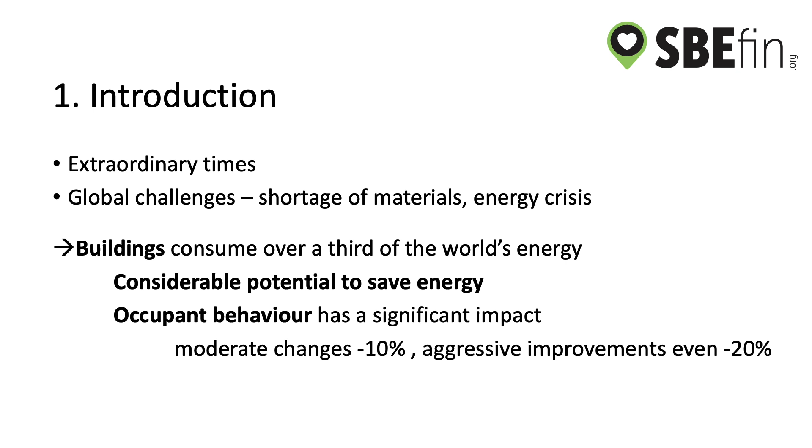We are living extraordinary times now. In 2019, the COVID pandemic struck the world, and after 3 years, when surviving from that, Russia invaded Ukraine. So these global challenges are causing shortage of materials and energy crisis. It's a well-known fact that buildings are consuming over a third of the world's energy. So there is considerable potential for saving. This paper shows one example from Finland. It's also occupant behavior that has significant impact. There is up to 10% saving potential with moderate changes, and with aggressive improvements even 20%.

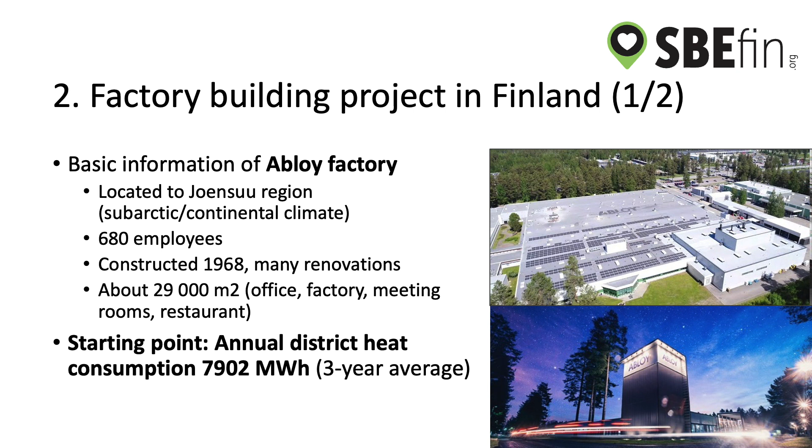The factory building from Abloy is located in Joensuu region, that is in subarctic or continental climate. There are 680 employees in the building, working mainly in 2 production lines. One is for the lock factory and another for the closer factory. Building is constructed in 1968 and has gone through many renovations. The size is huge, almost 30,000 square meters, with spaces including office, factory, meeting rooms and restaurant. There is great saving potential with energy. The starting point in annual district heating consumption is almost 8,000 megawatt hours in 3-year average.

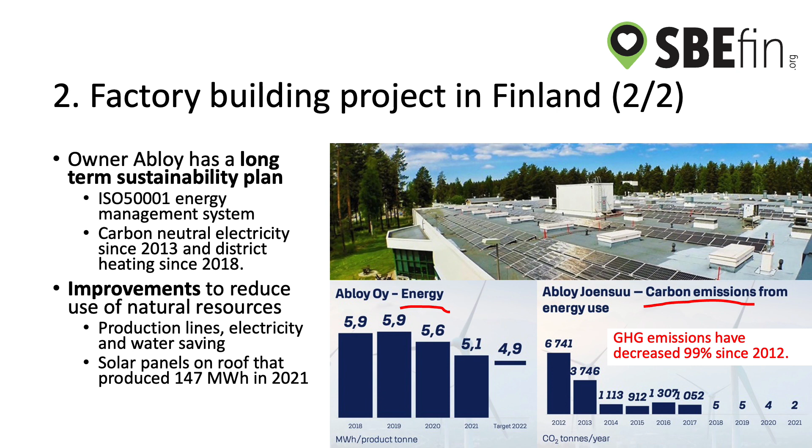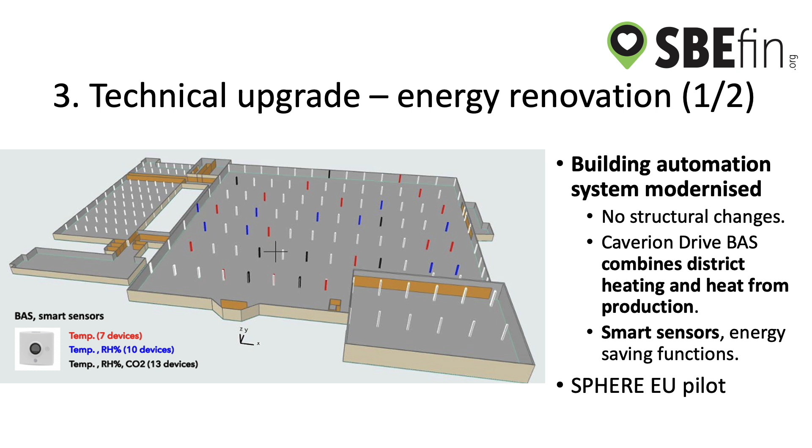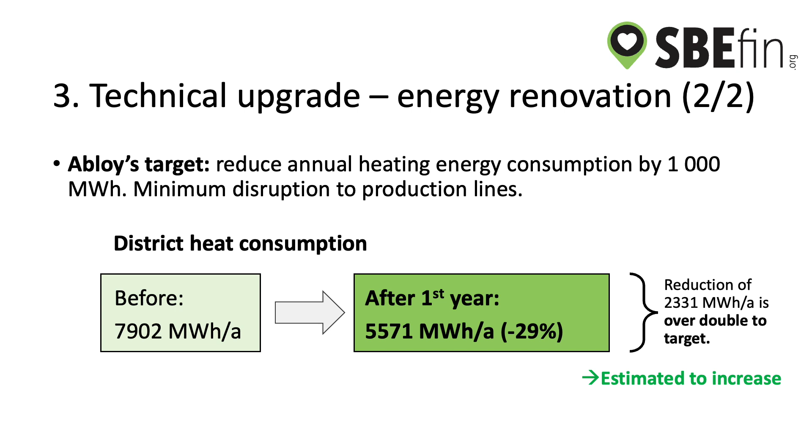The target for the project was the reduction of energy consumption for heating by 1000 megawatt hours, and since the factory building is in use with minimum disruption to the production lines, the project succeeded well. The results indicate that after first year, the energy consumption for heating was 5571 megawatt hours. 29% less than earlier, meaning a reduction that was over double the target. And this is also estimated to increase. 2 production lines were not operated full year. The reduction will be almost 40%.

Another result in the project was thermal conditions and well-being. The aim is to create tolerable working conditions for employees. Heating has to be balanced during the winter and summer periods. In Finland, the weather conditions have extremes during the year. In the winter time there may be even minus 20 degrees, and during the summertime over plus 30 degrees.

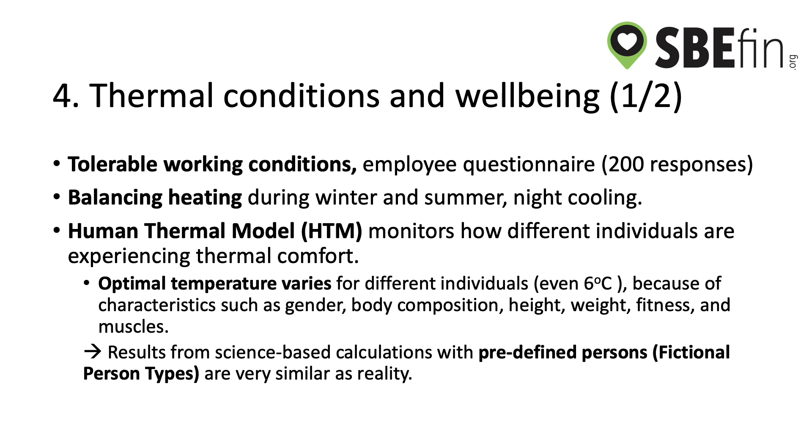One of the tools utilized in the SBEfin project is human thermal model, used for monitoring how different individuals are experiencing thermal comfort. The optimal temperature between different people may be even 6 degrees different, depending, for example, on gender, body compositions, varied heights, different weights, different level of fitness, and amount of muscles. In the calculations, predefined science-based person values are used instead of the reality. These fictional person types indicate reality very well. And also, there is no need to ask permission from the employees.

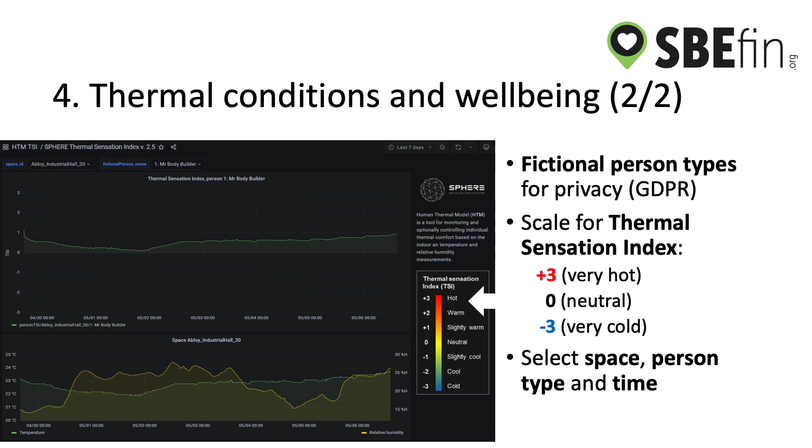The work shows how committed owner Abloy is on long-term sustainability. The positive results from technical upgrade by Caverion have already shown a reduction, -29% in heating energy consumption. The target was exceeded, and with human thermal model, the owner is also capable to monitor thermal conditions from employee perspective. To conclude, we have presented here that there is great energy saving potential in large and complex factory buildings, and therefore can provide better impacts globally.

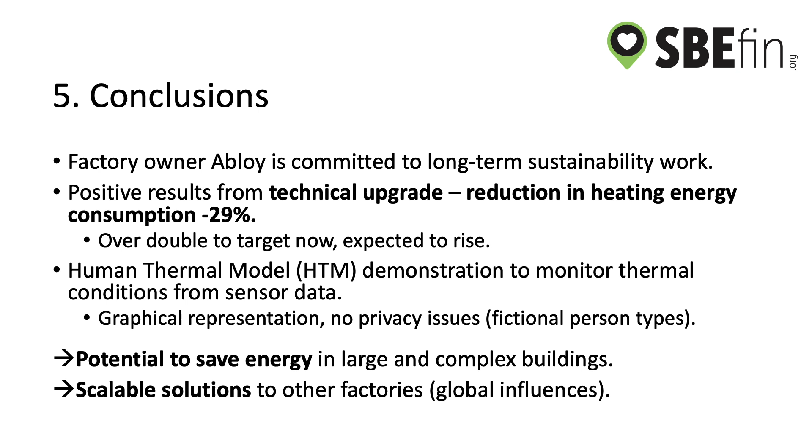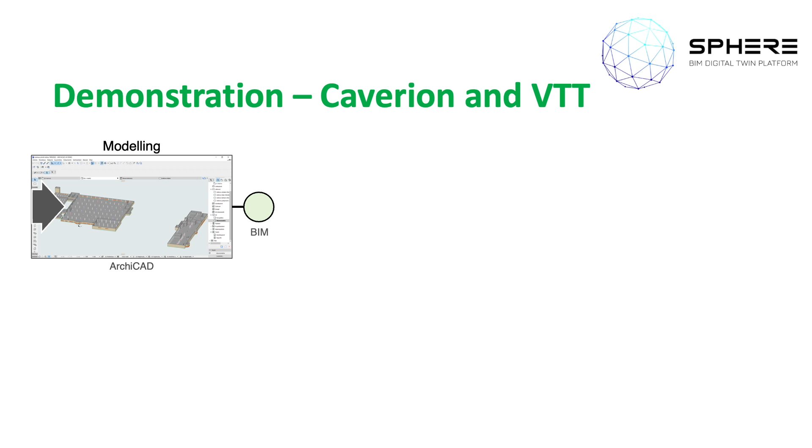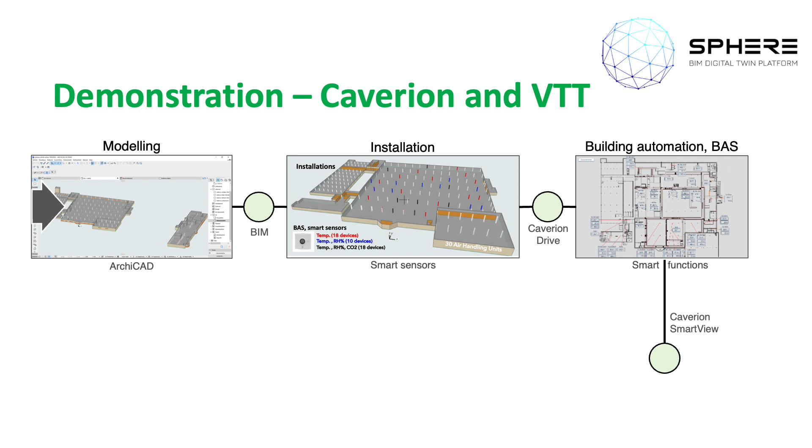In the end, we show demonstration from SBEfin project from Caverion and VTT. Building was modeled with ArchiCAD. The BIM model was used for the installation of the smart sensors that were connected to Caverion Drive building automation system to create smart functions. Through Caverion SmartView, the integration was done to VTT research platform to host pilot data in the SBEfin project. An API was built for digital twin for human thermal model. Results show remarkable energy savings and tool to monitor thermal well-being of the employees.

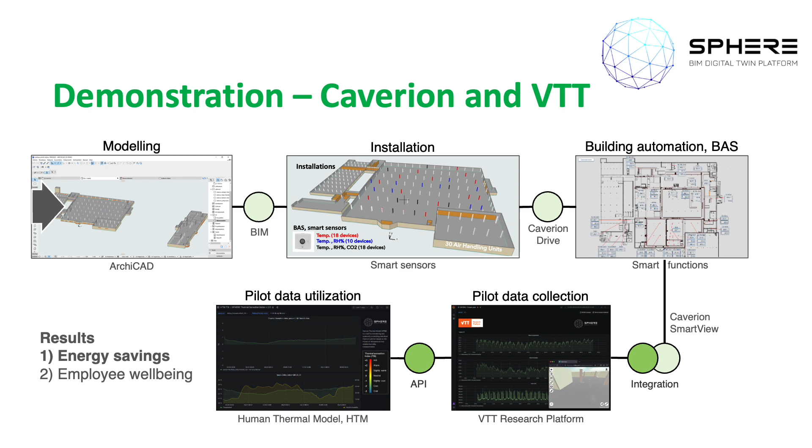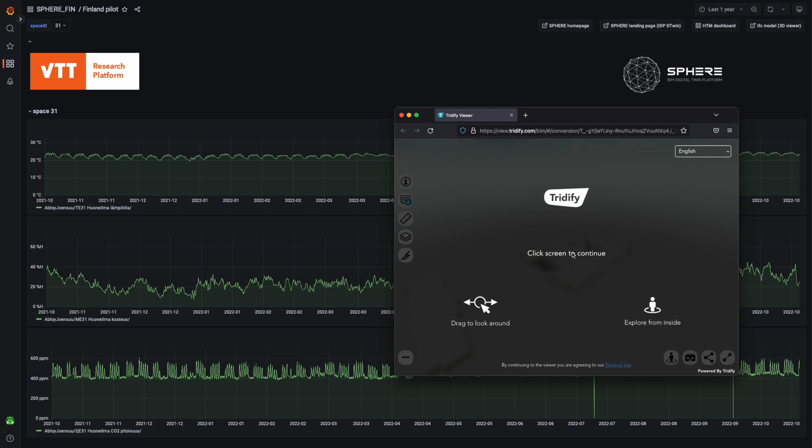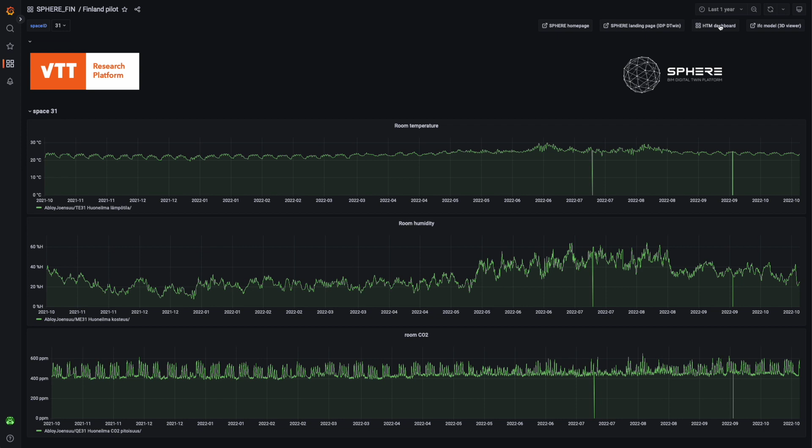Building data comes from Caverion Drive building automation system to VTT research platform. Dashboard shows graphically the data for 1 year on room temperature, relative humidity and CO2 emissions. There is also an integrated viewer to see inside the building. On top right, there are shortcuts to different tools to access human thermal model. When it opens, the last week data is available for viewing. Different data points from sensors are in a drop-down menu.

Another drop-down menu is for the selection of fictional person types. In this case, I'm selecting man and woman and see their thermal comfort. As we can see, in same thermal conditions, male usually feels warm, while woman is feeling a bit cooler.

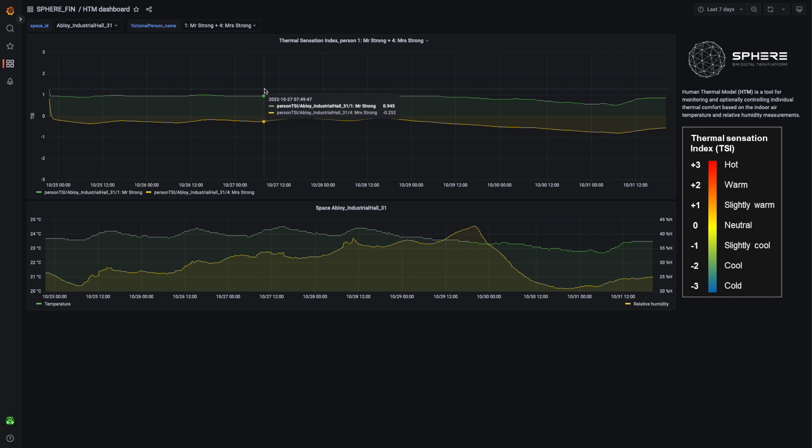The work presented from the factory building in Finland is one of the 4 case studies in the SBEfin project. The project aims to have an ecosystem where 3 core services are connecting 16 different tools together to gain various benefits.